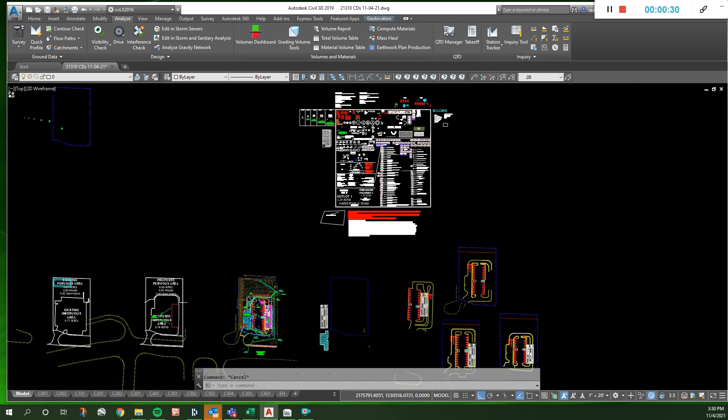So we know our elevations. I'm going to grab a piece of text, make this green, shrink it down a little bit, and we're going to assume that our top is at 10. So that's going to be right there.

This is going to be 2.5 feet down: 6 inches for the top and 2 feet for the cover, which is 2 feet minimum from the top of this to the bottom of the section. So that's actually right there.

Then we go down another 3.79 feet for the chamber, and then they have 9 inches. I'm just going to stick with the 9 inches since that's what they had on this, but typically that varies — typically it's 1 foot. So 7.5 minus 3.79 is 3.71. We'll just say 3.7 because I don't like doing hundredths.

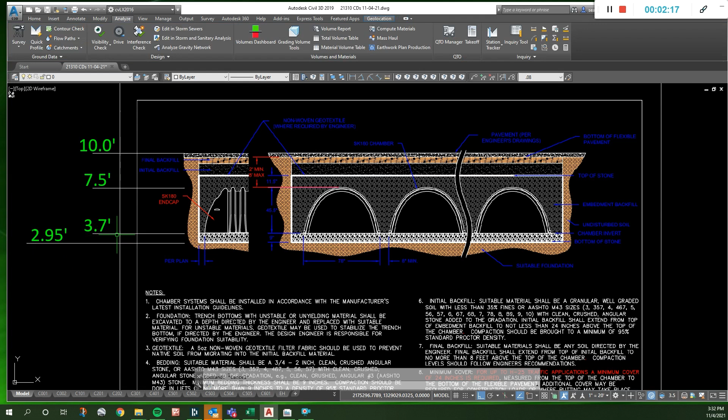And then 3.7 minus 0.75 is 2.95 — I guess we will do hundredths there since that's halfway. Alright, so that's roughly where we think we might do this.

In order to do that, we need to raise this up a little bit. We need to put some flumes in here. I don't want them getting near these metal brackets, so I'm just going to draw a line and go halfway in the middle, and then do it 2 feet on either side. Does that look kind of dark?

And so we have that one, and then we'll have one down here too, so that's probably where our flumes will be. Let's see, this slopes down in here and then comes back that way. This slopes down and comes that way. We basically have a swale here.

This water goes this way and this water goes that way. But I'd rather not be pointing water towards the building, this close to the building, when the water is already coming this way — because basically what we're telling the water to do is go like this and then come back here, and the water might as well just do that.

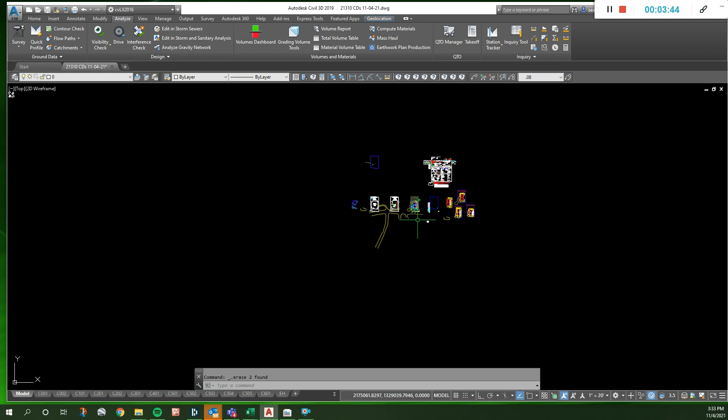So I'm going to recommend some other numbers.

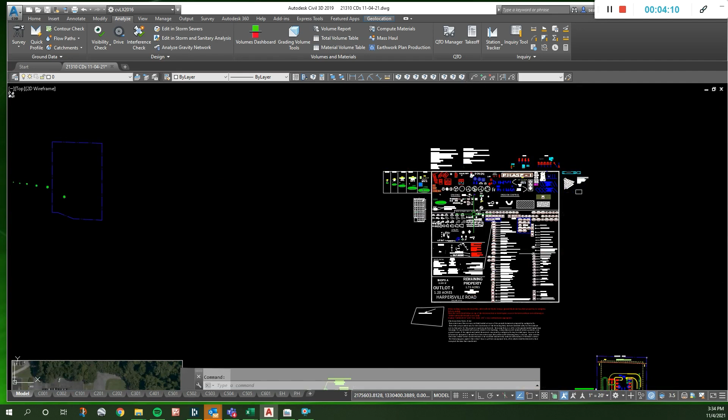Where did the spots go? What happened to your spot elevations, the existing and proposed? Do you know? No, I've just been seeing X's inside the block for a minute. Say that again? It's just been X's. I think that's the same across other drawings too. Shouldn't be that way — I don't remember any being there. Really? I was just using the COGO points and then setting the style to proposed and existing.

CAD title block. There we go. I grabbed the wrong size. Alright, let's get out of there.

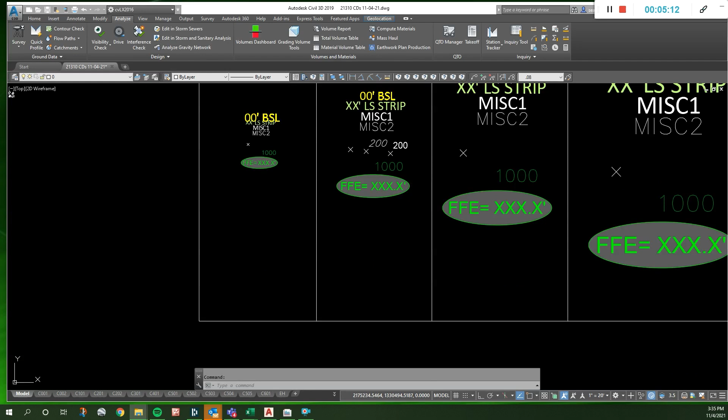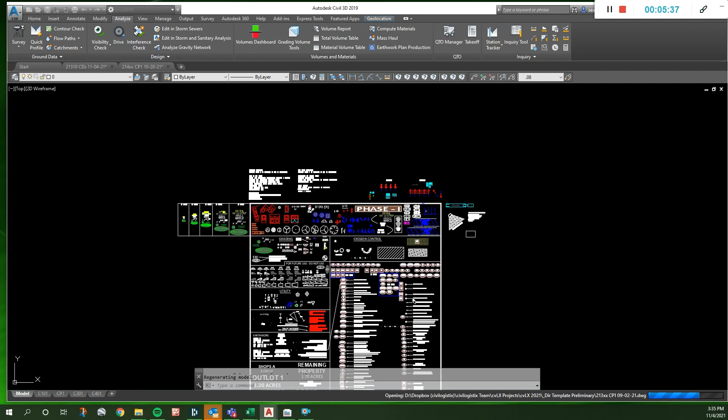Let's just check while we're here the project template — maybe it somehow got deleted out of here. They look like they're there too. But that's weird. Someone deleted the 10 of the 20 out of there. Now they're all in the older one.

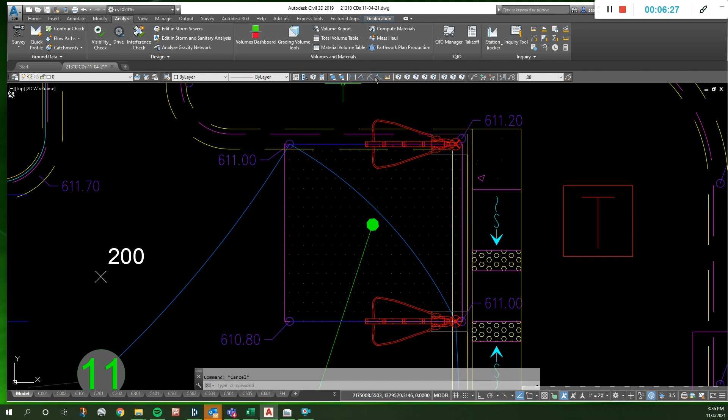Alright, so this, you've got 2 tenths over 18 feet. 0.2 divided by 18, it's 1%. That's good. Let's just keep this going down at 1% for another 25 feet, so we'll round that up to 3 tenths. So this will be 610.7.

And let's make this — what color do we want to make it? Yellow? Does that stand out enough to know that they're an optional thing? We drop another 2 tenths, which would be 5.

This curb line shouldn't stick out in front of this guy. I keep seeing this lately — I don't know where it came from, but it's already hard enough.

You know, when you go into a parking lot, you've got a little drive aisle, and then you have this little curb there, and you need to turn. There may be someone coming out, and you need to make a sharp turn to get in here, and you've got this curb sticking out, and you wish it wasn't there. What I like to do is draw them — this is ideal, but I never take the time to do this on a preliminary.

If your parking spaces are like this, I like this guy's gutter line to be like that, and the curb to be like that, so when you look down this thing, visually it's like a straight line all the way. If you actually put the face of curb out at the same place, which is how I draw all my preliminaries, the gutter actually sticks out. So when you're driving and trying to make this corner, it physically looks like the gutter is sticking out past this, and you've got another car sitting here, and you're trying to squeeze in, and you're like, man, why wouldn't they just give me a couple extra feet?

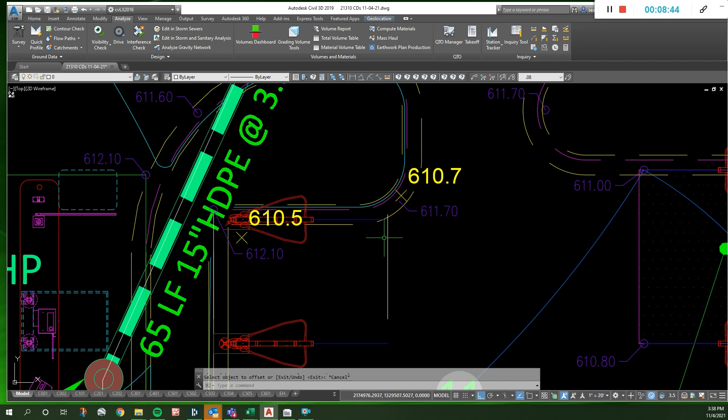So if anything, you want to move this back 1.5 feet. Instead of the face of curb being there, the gutter's there — that's what you'd do ideally. We're all about speed for preliminary, so we usually just leave it that way. But in this case it's actually sticking out further into the drive aisle, so it's going the wrong way of ideal. We should update that — if anything, think about pulling it back, not sticking it out more.

And then what that does also is this guy that's bailing out and coming in — instead of coming in more towards the center of the driveway, you're putting him over on the side of the lane where he should be.

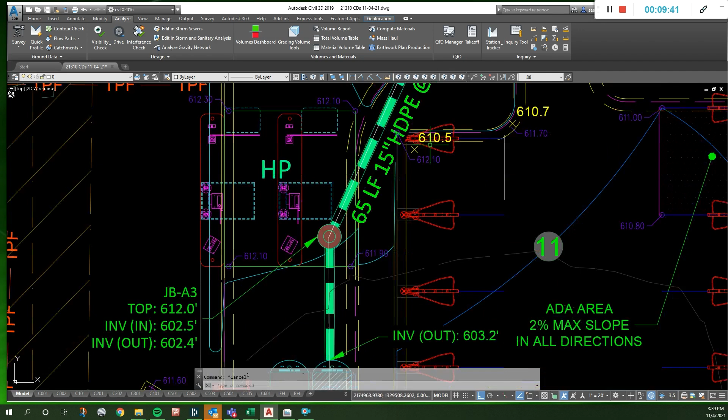So we kept this at a minimum slope. One thing you can think about, if you need to get water from here to there, if you slope it in two directions at the minimum slope, it can get the longer distance easy at the minimum slope. So now from here to there is 70 feet, so if we drop another 7/10, we're at 6.9.8.

And then we need to get from here to there — that's going to be another 1/10. Seven. And then six.

Now you can see we didn't meet my goal of 10 — we're short by 4/10. Let's just review all this: 11.5, so we drop a 1/10 there, 4, and then 9 should be kind of 10.9, but we're at 10.2. This is actually going... what are we doing here?

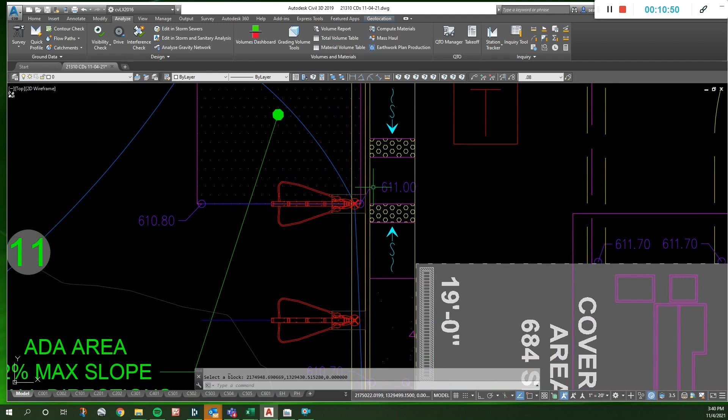It slows down for the hatching when you get out of your van. Did Shane have that? We agreed he was going to put the door in here on all these projects. I think it's fine on this one because we have enough space, but on some of them we don't have enough space.

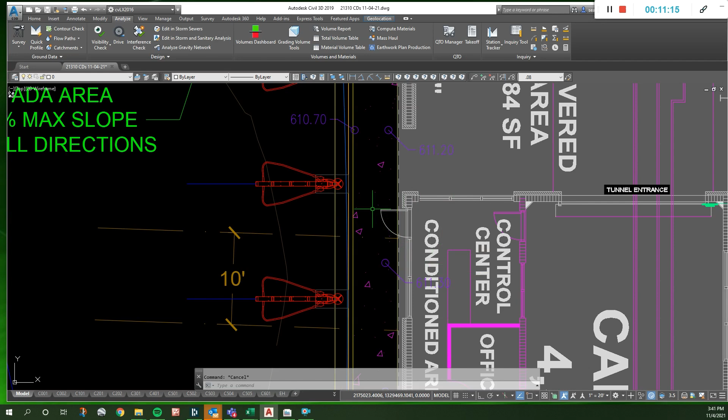So let's look — Halco Architect. Okay, so we don't even have anything from him yet.

Hey, Tim. Hey, I've called in enough messages regarding the Mary Camp progress, yeah, and just want to give you a heads up — I haven't heard back from anyone yet. I didn't know if we should respond back with those emails and say something, or... No, because I told him we're checking into it, and I gave him the info that we have. They just had on that email there was like an urgency for where to go — anyway, they were saying we needed to know something by today, whether they wanted to submit something for this week, tomorrow, or next week. Yeah, okay, well then you can tell them we haven't heard back, I guess. Okay, all right, thanks, all right, thanks. So let's leave it.

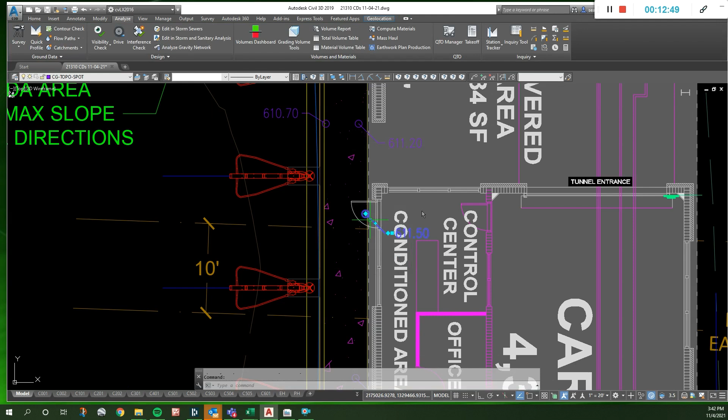So this guy in front of the door would need to be the same as this, or if you're 2/10 down, you can't get up in there, right? So this guy should be 0.5, and then you typically slope 1/10 over the sidewalk, so that's going to take you down to 4 right there. And if you keep this perfectly flat, it's going to be 4 here, and then it's going to slope down to 10.9.

Now you could also choose to just start sloping down at 5%. Anything less than 5% is ADA. If it's over 5%, it's considered a ramp, and any ramp over 6 inches tall has to have handrails.

If you're going to do a ramp, you might as well do the steepest ramp you can, which is 1 inch per foot, or for a 6-inch curb, a 6-foot ramp. If you make a 7-inch tall and 7-foot long ramp, you need handrails for the whole thing. So if you're going to make a ramp, just make it the steepest slope and either keep it to 6 inches or less so you don't need handrails, or at that point drop down to 5%. Well, it also gets confusing.

If you decided to go down at 5%, you'd basically go down over the course of one parking space. You could slope down your 6 inches, but at that point there's really no reason to do that when you can just do your normal ramp in 6 inches. You don't want a low sloped ramp with half a curb tapering down over some long distance, because then it's hard to pour. You just want to do as much straight curb as you can, then do your ramp, then pour everything flat.

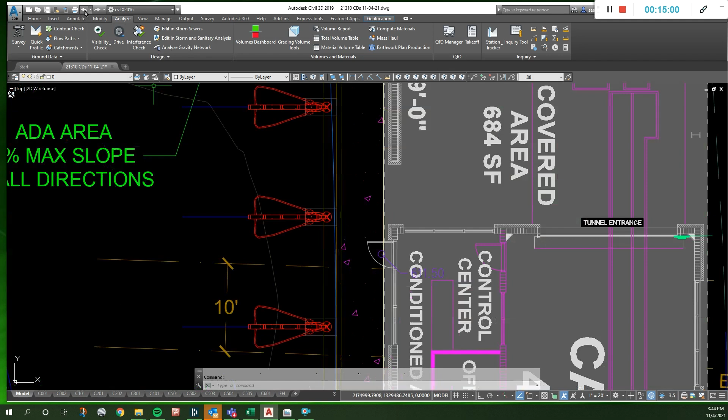So this guy, we'll get rid of those. Keep that at 0.5 and 0.4. Did I accidentally delete that 4? Yeah, delete these 2. Why are these things acting funny? Delete, delete.

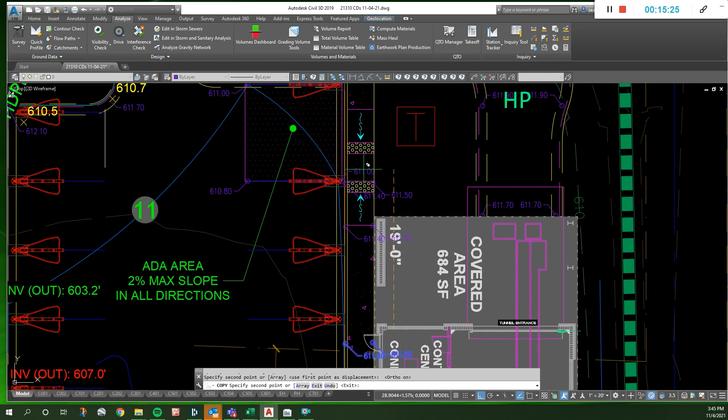So that's going to be the same thing there. And then when you get here, it's going to go down your 6 inches. So this guy is going to be 0, and this guy is going to be 10.9.

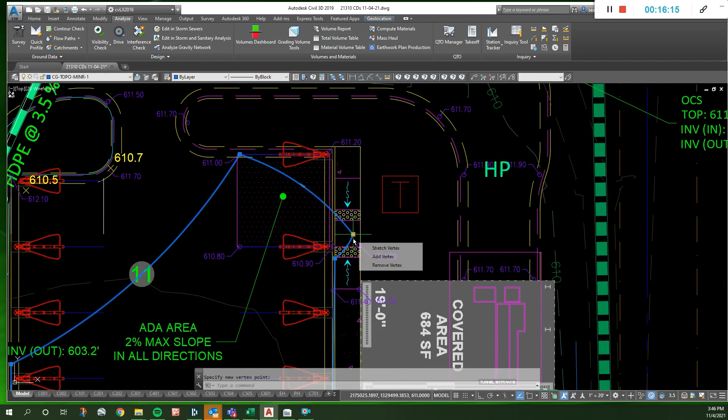Which means your... is that a curve? Yeah, I'll just make that a straight line. And that's just going to stay in here in the curb until you get to the ramp. Make that a line, let's go ahead and make this a line. So that's going to cut across this, because this is below 11 and that's above 11, and that's exactly 11, right? Does that make sense? Yeah.

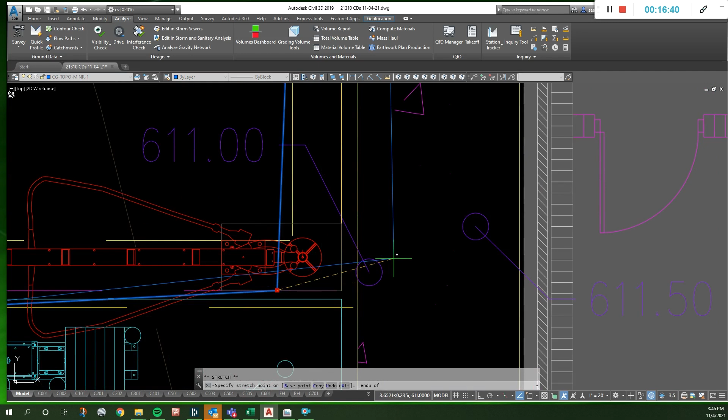And we don't want any curves in there. Where's your curve line? There it is. Is that another curve? Oh, that's straight. Okay, alright.

This guy, and you really, there's no reason to have a ramp going up. Ramps are expensive, I've seen them priced out as much as $1,000 for just a handicap ramp. So why just add a $1,000 to have a ramp that goes nowhere?

So we can just keep all of this. That's another thing: whenever you hatch things, just hatch everything individually, because if you ever need to make changes, you have to rehatch everything and not just the one thing you did. So we need to rehatch this.

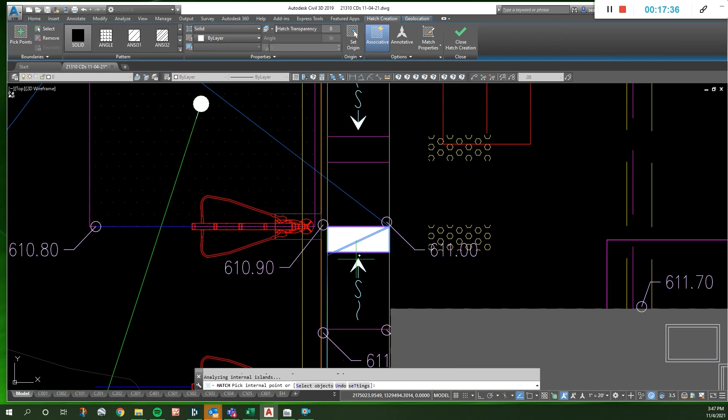I'm going to use this guy to take that and apply it there. Then we can go ahead and delete that, and get rid of these guys. I'm going to change this to not associative, and move it down here where we can't really see it, instead of rehatching everything. That solves that problem.

And then we get rid of that. And then this guy, we want to break. On this side, it's a hard line. Let's go back to the site plan so you can see there. Actually, this is the one I meant to break: the face of curb.

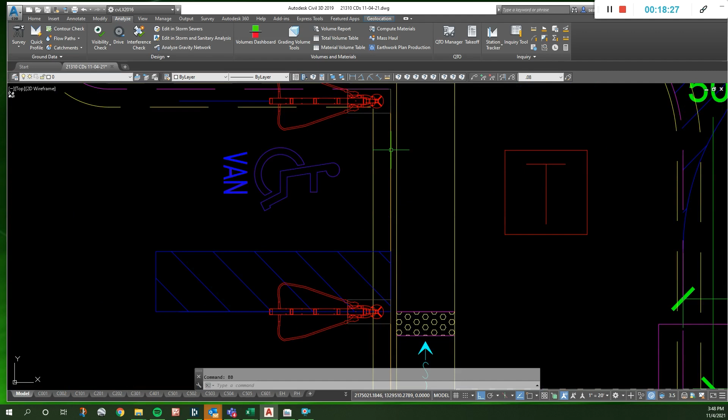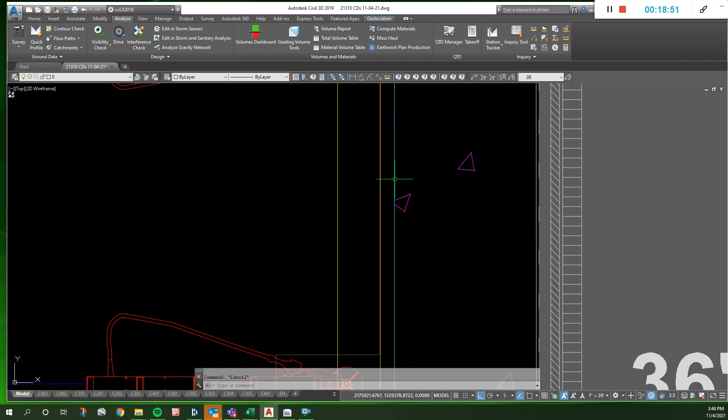Here, there's no curb, so we need to just delete that. This side, I would make it cyan because it's really part of the sidewalk. This guy is part of that sidewalk too. It's really just a seam - this is concrete and that's concrete, and they're both at the same elevation. It's really just a seam, kind of like we have out front there.

And so that stops when you get to the ramp, because this isn't curb and gutter - this is just a custom thing they have to make, right? So I like to take this guy and make this a different color here, because that's where it starts changing from being a curb to something special. And then that shows your ramp is there, and then all of this is just flush.

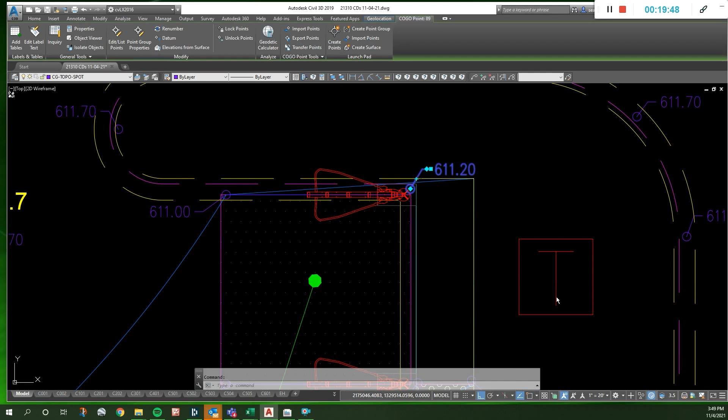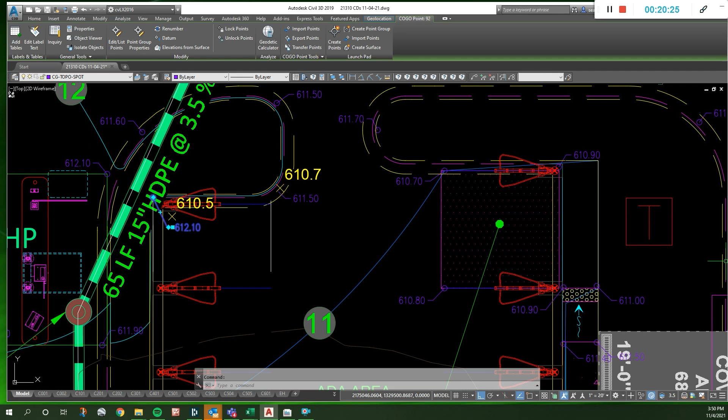Alright, so we'll go back to the grading plan, and really all of this can stay the same. This guy is going to be 10.9, and then we need to slope down, so we need to lower everything a little more. We're going to change this one to 10.7 - promise we'll get to some other stuff. This one's going to go to 5, everything's going down 0.2. 5. 10.3.

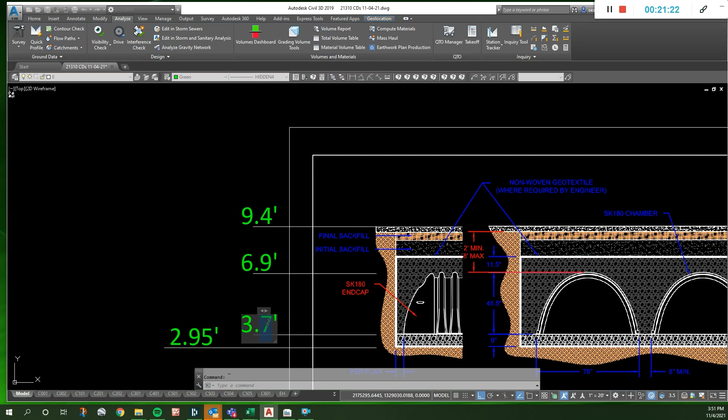Ten point 6, 5, 4. Okay, so we're at 9.4. So let's go back down to this guy, and we'll take 6/10 off of everything. 9.4, 6.9, 3.7, 2.95. Alright, so the bottom of our thing, these are the elevations.

So what I was talking about yesterday, they may want us to give water quality because they probably typically see water quality, but we're in a weird situation where we're reducing our impervious area, so we technically shouldn't have to do any. But they may still say you should do something. Well, we have to have this stone here anyways for the chambers, so why don't we just put our hole here, and then we're giving them some anyways.

Just take credit up, and then we'll put our hole right there. So our hole we'll put at 3.1. So we'll lower this guy down. So it was a weird number, but is it a really good weird number? 6.2. Let's leave it at 6.2.

We'll have a little bit low cover there, but you could also say that this slopes 1/10 of a foot. By the time we get here, we're up to 6.5, or sorry, 9.5. By the time we get to the actual chamber, you know what I mean? No, this is 9.4.

This has to be low. All of this has to be higher because it slopes that way, right? Oh, so this is going to be 9.5. Well, if it's flat, water's not going to move. Oh, the ground slopes, not the tent. Okay, yeah.

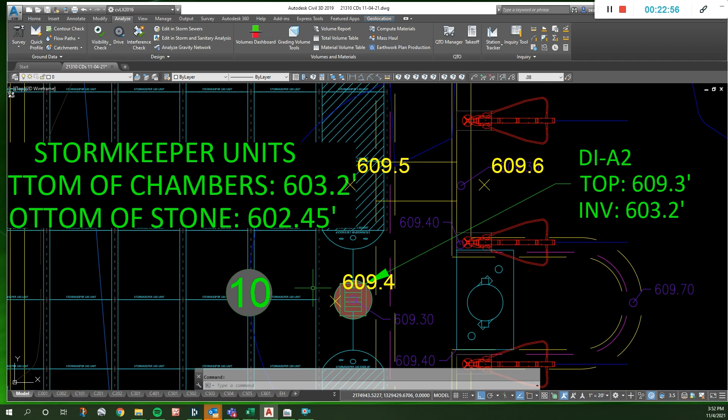So if we were measuring 2.5 feet down, we could really come up 1/10 and measure 2.5 feet down, and therefore we just keep this, and then we don't have to change any of that. So again, we don't want to make this any deeper than we have to, so let's just do it at 1%.

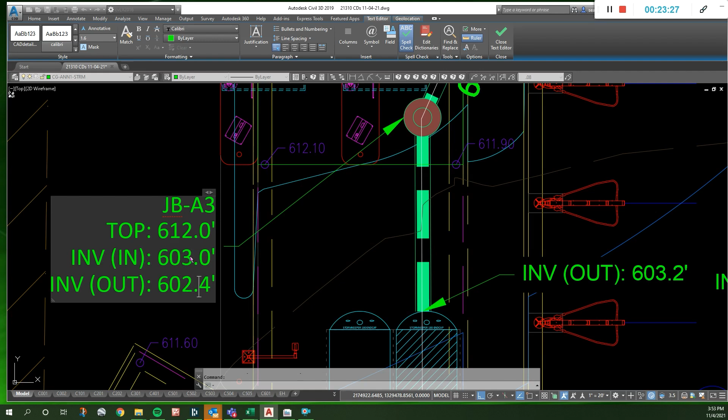So this guy is going to be 21. We'll make him coming in at 3 and going out at 9. And from there to there is 45. We'll do 5/10. So it's going to come in at 2.4 and go out at 2.3.

And then from there to there, 90. So 1.4. So we're going to come in at 1.4. But then we're going to go out 5 feet deeper so that we can get past this swale here without having our pipe come out of the ground. And now this is more shallow.

Now another thing we need to think about is the geogrid. If we're doing a modular wall, they're going to have some geogrid coming in here. There won't be any here. Typically, the geogrid might be as deep as the wall is tall.

So if we're down at 602 and the wall—what's the top of the wall? It can be labeled on the site plan. Nope. Top of grade, 602, let's say 611.5, and the bottom grade,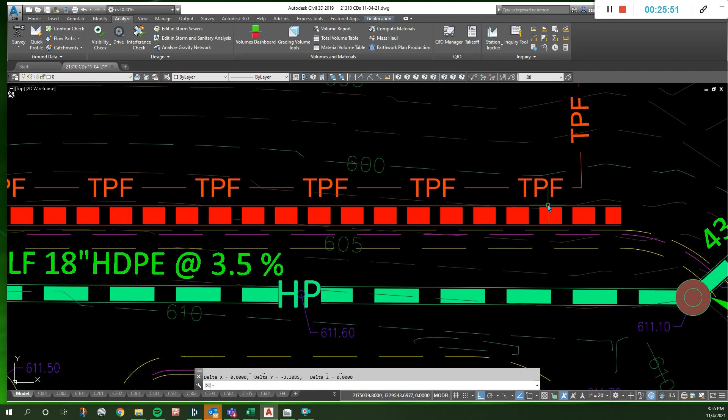you really want to have kind of an even bottom. You don't want to have it going up and down. It just makes it harder for them to do. So this is kind of our tightest spot. Right there we are 3.3. So if we made this guy 601—wait, that's 602. If we made that at 602,

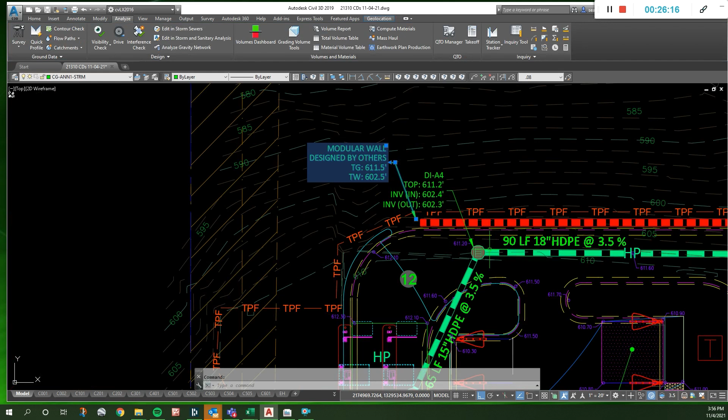whatever the last stuff, alright, 9 feet. That's not that bad. Oh man. So this being at 602 is at the bottom of our thing, isn't it? Needs to be lower. Not necessarily. So if it's 9 feet tall, you can imagine the geogrid might be,

you're really not going to have any in the top few feet. But if this is 9, that probably is going to be about 9. And if we have a pipe there, we probably want to be about 9 feet away. And let's just offset 9 from this guy.

So it'd be nice if we could move this over just a little bit. Here we're fine because it's out of that thing. But this guy, we can move down. I don't think it's really going to make that big of a difference because it's still going to slope.

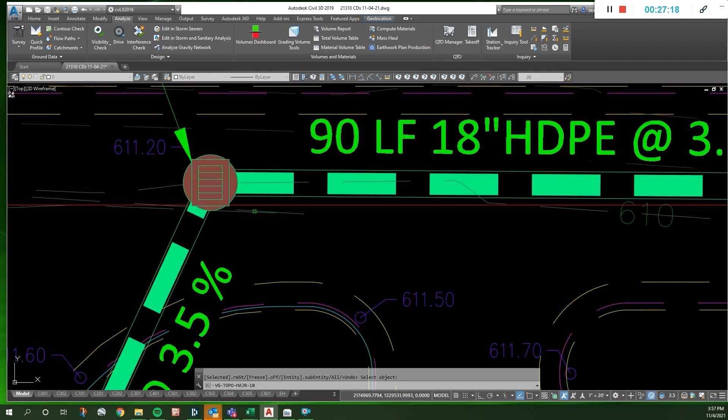Let's just move that guy a little bit. And I'll move it in the direction of this pipe so you don't have to change much on your profiles, like that. It's okay, profiles are TBD. I'll just lower that 4 feet. And that gives us some space there.

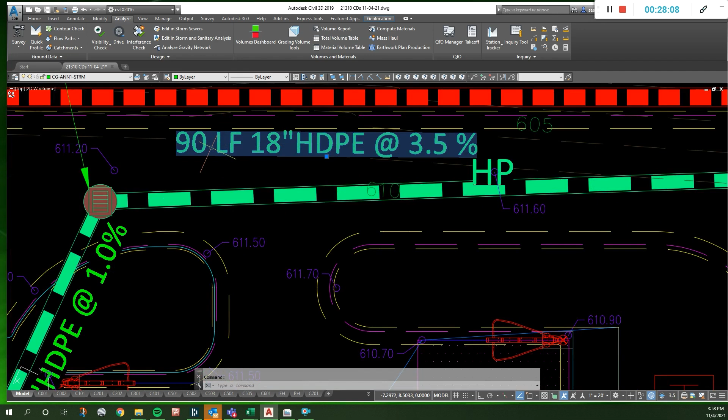Alright, so now this guy is 61. We're going to make all these 24, and it's basically 1%. And now this guy, I think, was he 90? 91. 91, 24, at 1%.

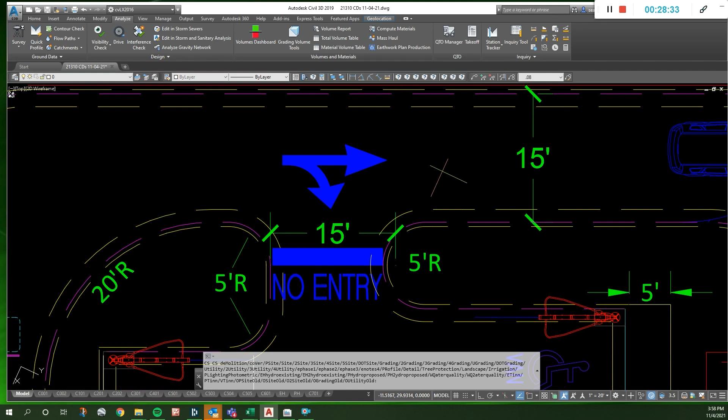Alright, now we have a little more space here from that footing, which is kind of good. Alright, so we redid that.

So now let's think about our water quality. The area of the bottom is 3160. We have 9 inches of gravel, so 0.75 feet of gravel times 0.4. I like to think of things in per unit volumes, especially with cross sections. So we have 0.3 cubic feet of storage per square foot of cross section.

And our cross section was 0.3 times 3160, so we have 948 cubic feet of water quality volume. Actually, nothing was soaking in, was it? Infiltration, yeah.

Wasn't it like 0.03? Can we also factor in those end caps for the rock under, because the area was drawn around. Yeah, but we don't know what that is. I don't like calculating that volume. We let Southeast Culvert calculate that for us, and the software can calculate it for you. But I have no idea what's in that three-dimensional curvilinear shape.

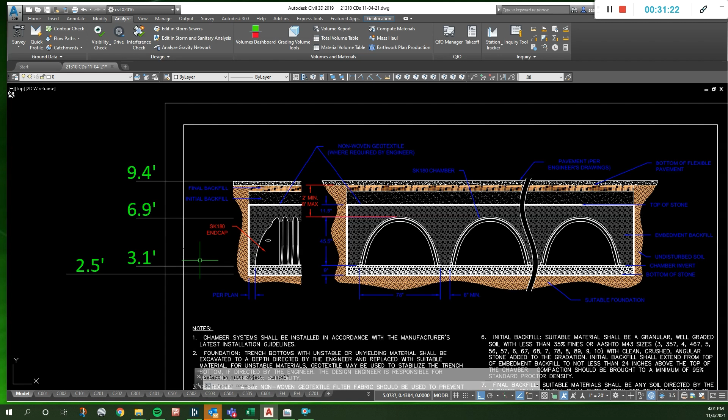And 6 inches below is 2.5. Alright, so now if we want to do water quality, we can't say that's our water quality, because it's never going to soak into the ground and it can't get out the hole. So it's basically, once it rains once, it's trapped forever. So why waste the money and buy clean wash 57 stone? You might as well just put crush and run in there. So we're going to do our water quality by just giving them a little hole for a small volume.

And they said they wanted 1.1 inches. 1.1 inches divided by 12 to convert to feet is 0.09. And let's just say we gave them a quarter acre worth, as though we were increasing our impervious acre for a quarter, but we're not - we're decreasing it. But we're just going to give them some anyways. Times 0.25 times 43,560 - that's 1,000. So that's about where we were.

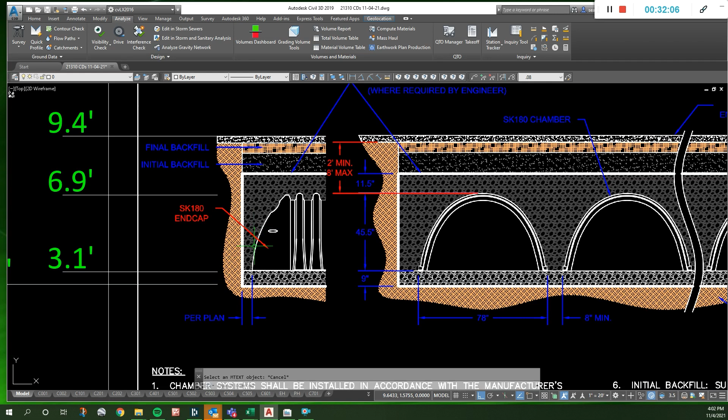So let's just kind of keep in mind, ballpark, water quality, 1,000 cubic feet, and that is 1.1 inch divided by 12, times a quarter acre, times 43,560 square feet per acre, equals 998.

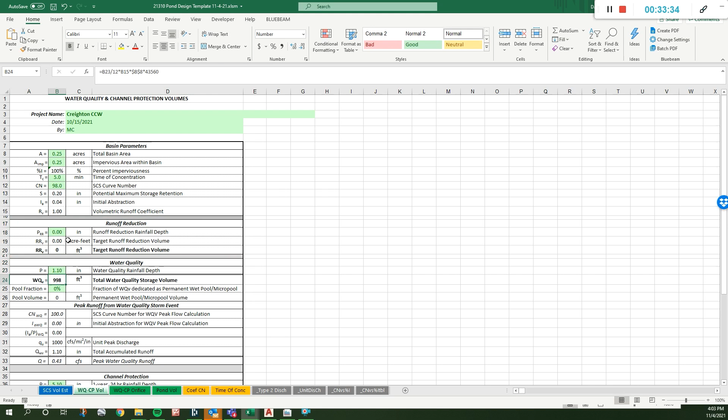Okay, now we don't really need to do this, but we know that in our chart, calcs, pond design - is this just a random thing? Quarter acre. Water quality, 1.1 inch. So there's our 998, right?

Do you have your pond in here? Is that from this? Yeah. Okay, that's... and it's probably going to change a little bit. Oh, we don't have any - yeah, because since we're using just underground, it had volume, so we had to go in and enter the volume, put the volume in rather than... yeah, that's fine.

Right, that's different. Where do the chambers start? Let's look and see where the chambers start.

We're gonna have to go back and iterate and change this because I think the pond's way too big. But there's no reason to get this exact and then go back and change the pond and put all the numbers back in again. So I want to get just a rough ballpark of this matching that, so we can get this roughly correct, and then go back and redo it all at once. So the bottoms, the inverts of the units, are at 603.2.

I can't type anything in. 603.2, and that's 0, and then we go up to 603, and that was 690. No, it's going to be 603.5, 694, and then the next one up, 604.11. 1284. That's more than enough.

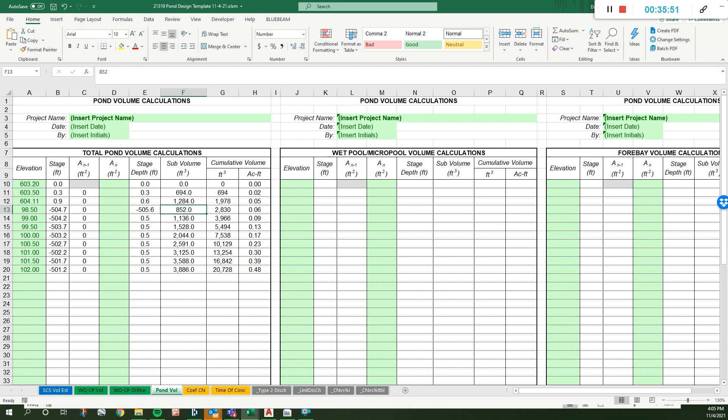Where do these kind of strange things come from? Oh, it probably spit it out, didn't it? Yeah, it just divided it into 10 pieces. That's the shape of it.

So there's our water quality volume, and it happens at 603. So it comes up 0.4 feet above the bottom. Now I'm just going to go back in here, water quality orifice. 603.2 is the bottom, and it calculates it at that. That would just clog instantly, so we'll just do an inch, since we don't have a real requirement anyways, and we want to give something that works.

Alright, so now we know that we're going to do a 1-inch hole. Let's go in and start designing our pond. Here's where you need to start paying attention again. We don't have any water quality requirement. We're doing a little bit anyways out of the goodwill of our hearts, but our only requirement is attenuation, right?

So we want to let out as much water as we can let out, but not go more than it was previously, right? If we're holding back extra water, then we're just wasting volume in our pond, and our underground pond is really expensive to begin with, so why waste extra volume? So we just want to start letting out as much as we can from the very beginning, with the exception of our water quality volume, and we're not going to make that very big.

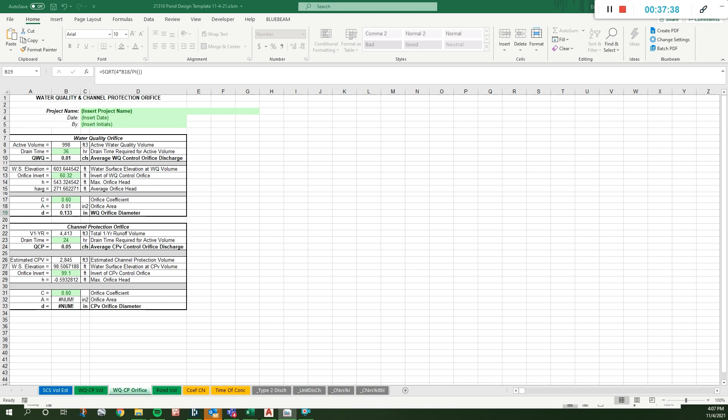For now, we're just going to leave this the same. And I like putting my outlet pipe a little bit lower than my holes. My holes are, what is this? This thing, where can we move this guy to? There we go. The bottom is at 603.2. So that's where our first hole will be, 603.2, because below that nothing can drain out.

So we'll put this guy. Oh, that's what we said this pipe was draining out at, right? Yeah, 603.2. Let's make, we don't want to make that a little higher. We'll leave that the same. And we're going to make this a 1 inch, because that already is going to be thinking about clogging.

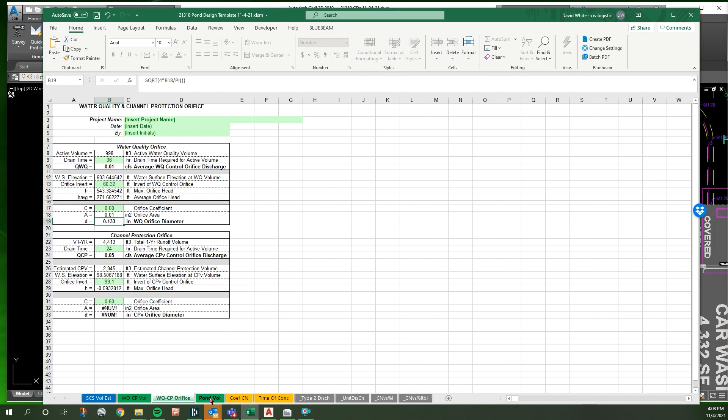And then our next hole, we'll just come in, I don't know, 3 inches above it. Oh no, we said, what did we say it was? How big? 0.4? Yeah, pond design. Water quality elevation 603, yeah, 0.4. So we'll just do a half a foot, so we'll come up

603.7. And the reason I did a half a foot is we typically come up an extra tenth over whatever this elevation is, just so the contractor could make it wrong and they don't encroach into that volume. So if we just go by that same principle, that makes it 603.7. But in reality, we don't have a requirement, so we could kind of go up or down anyways. But 6 inches is also just kind of a nice even number. You know, it's not that big. And then if you have a hole down here, it still is just a small gap in between.

So let's put a 6-inch hole, and we'll see what happens. And so when you run these things, you always want to start, we're going to design from the bottom up. And we're going to, because once the water ponds up to a certain volume, everything below it is just going to stay exactly the same. You know, if the water fills up to here for a 1-year storm, we get the 1-year storm working, it's going to be the same exact discharge every time it fills up to that elevation.

So once you know, we get this one dialed in, then we're going to go to this one, and we're never going to go back to that unless we change the pond shape, and then we got to start at 1 again and work all our way up.

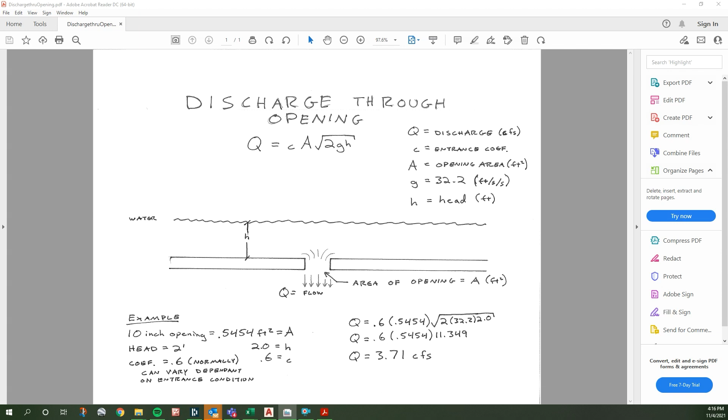And we're less than 6,000. All right, now here's something else you need to think about.

When you make changes to the pond, you heard Michael say this, just change one thing at a time and see what it does, and you need it to make sense. If you change it and you think it's going to go down and it went up, don't just try a different number. That's how you get not good at doing hydrology studies. Make sure you understand why it did what it did. And if you don't, then come get me and I'll help you figure it out.

Occasionally it doesn't do what it's supposed to do. Like we ran some tests, this happened a few years ago, and it wasn't doing right. I posted on a forum that the thing was jacked up, and then everybody else started posting too that they noticed it was funny, and it turned out that a Windows update had made it kind of buggy, and Autodesk had to come out with a fix. So software is not perfect. If it's not doing what it seems like it should be doing, it could be that you're just not understanding it right, but it could also be that it's just wrong.

But it might take a while before you're confident enough to say the software is wrong and your head is right. But it has been wrong. And last night it was doing that again, and I checked, and sure enough there was another fix that they had put out a couple months ago.

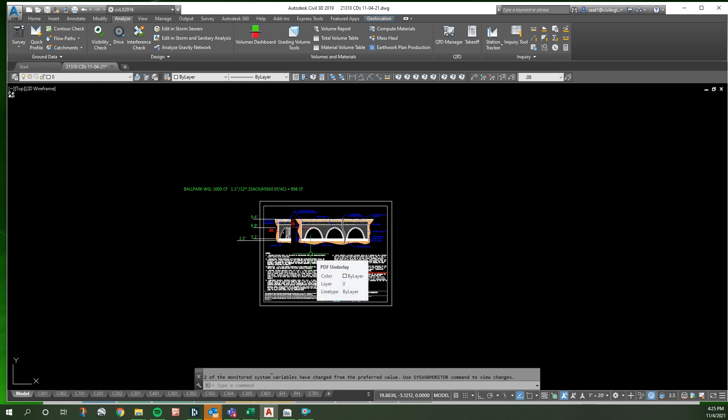What if we could just do 2 or 3 rows? 1, 2, 3, 4, 5, 6, 7, 8, 9, 10, 11, 12. So we would need about 3 rows times... 3 rows of 12. That gives us. So this length is 99.

Yeah, good. I see you're using those things. 99 and a half. Alright, so let's go back in here. Let's save another one as V3.

We're going to keep that the same, keep that the same, keep that the same. Barrel length is 99.5. We're going to do 3 barrels. Headers, yes. Stone encasement, yes. The bottom, we're going to do the same as that because there's not going to be any storage underneath of it, so we'll do 603.2.

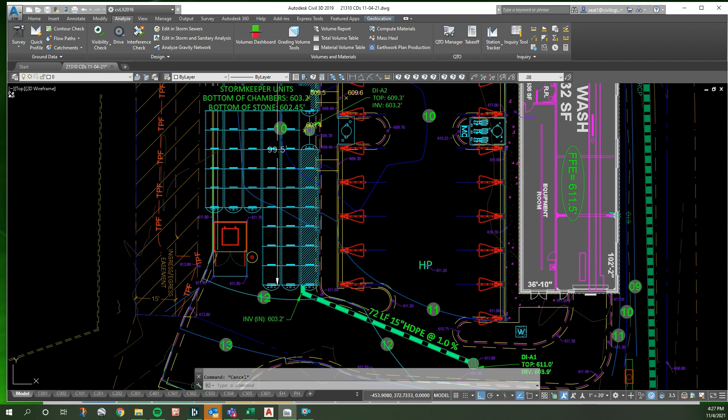The width, wouldn't that be? I thought that was the total width. Let's see, 7.39 minus 6.5 is 0.89. Eight inches. 78 plus 8 divided by 12, 7.81. Did I do that? 78 plus 8 divided by 12, 7.16. So I think that should be 7.16.

7.16. And then the depth is 3.79 plus another foot on the top, so we'll call that 4.79. Alright, so now we're down to 6,800. 36 times 180. So that's a little bigger. I wonder if we have more stone than their standard thing.

Oh no, we've been talking for an hour. This is getting ridiculous. Cut sheet.

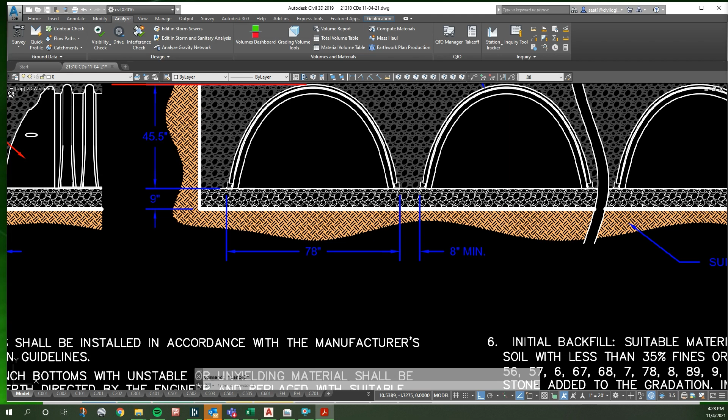So 9 inches is their standard. And chamber volume of stone, and they have it 12 inches on top. Wonder why this is coming out bigger.

Let's do 11. 1, 2, 3, 4, 5, 6, 7, 8, 9, 10, 11, 12. That's why, one reason why. So there's 12 and 3, we'd lose a couple there. That's 85.3.

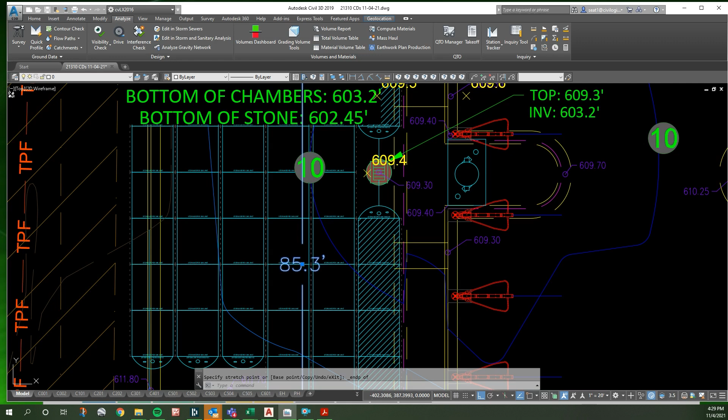And if we're losing 2 units here, divided by 3 barrels, that's 2/3 of a unit on each barrel, right? And if each barrel is 7.1, 7.1 times 0.667 is 4.8. So let's just take off another 4.8 feet off of this, which is 80.5.

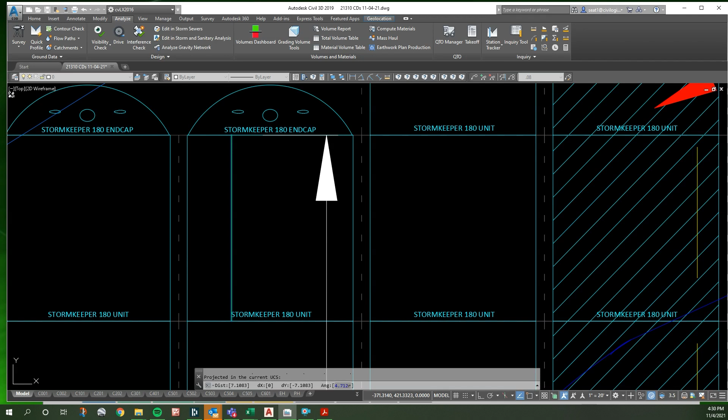Alright, so now we're closer. Let's roll with that. So basically what we're saying is we're not going to have these guys, and we're not going to have any of those guys, and we just have this. Is that fair? Mm-hmm. Does that make sense? Alright.

So now we've got to start all over again. But we've already explained everything, so it shouldn't take as long this time. That's about the same, actually a little bit higher because now that our pond is smaller, it's ponding up taller than wider. And we're getting more head, so we're letting more out. So that's kind of a good thing.

So that's okay, that one's still okay, that one's still okay, that one's okay, and that one's okay. So we could still make this weir a little wider. Let's try making this a foot and this overflow 3 feet.

We're still less, we're still less everywhere. Alright, so let's go back into...

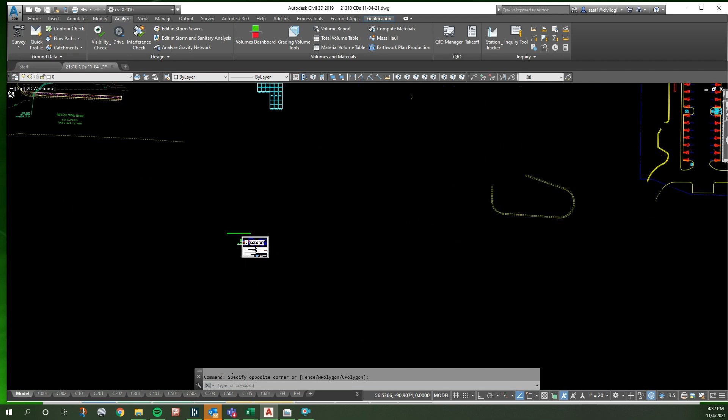I guess one thing to point out, we didn't really need to draw anything that detailed in order to put this in Hydrographs. We just needed to have kind of an idea of our cross section, and then either how many units or what general size, and then we just put that information in Hydrographs and designed our thing. So you can do all of this stuff before you really draw it out. All you need is some generic boxes to kind of pencil in your volumes or sizes.

Does that make sense? You need the area of it to determine the volume. Yeah, especially because we generally we're going to be doing infiltration, and so in Georgia for an infiltration trench, they want this to be 3 feet. So in Georgia, a lot of times we make this 3 feet, but it's 6 inches for this project.

Well, here it's 0, there's no storage volume at all. There's no infiltration there, it's just crush and run, totally solid. So we can't say that we're using an infiltration trench, or anything, because there's nothing, they can't soak into the ground.

So if we have 3 feet in Georgia times 0.4, that's 1.2 feet of water volume per unit foot. And if we had an area of 3,200 times that 1.2, we would have 3,800 cubic feet for runoff reduction. When you do your stormwater strategy, you just type your numbers into the spreadsheet, and then it tells you what your runoff reduction number is. And then we just made a quick calculation right there, to see if you're bigger or smaller.

So really all you need is to know in your head what your cross section is, and then sketch out an area and multiply it together and see if you're good for your runoff reduction. Alright.

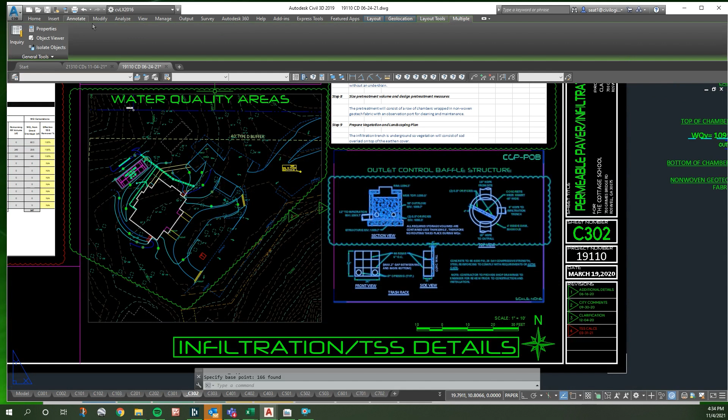This guy. And you don't have a 302 yet, do you? No. Let's make a C302 water quality sheet. Yeah, or just a stormwater BMP sheet, really.

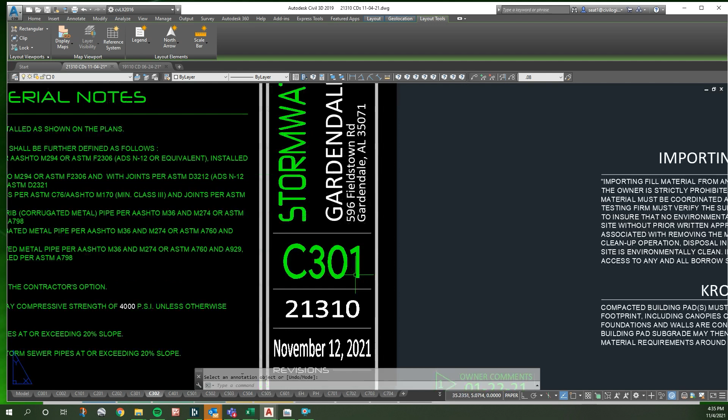In this case, our BMP is not so much for water quality as it is for attenuation. We really want a sheet for each BMP, so a sheet for the detention and a sheet for the OCS.

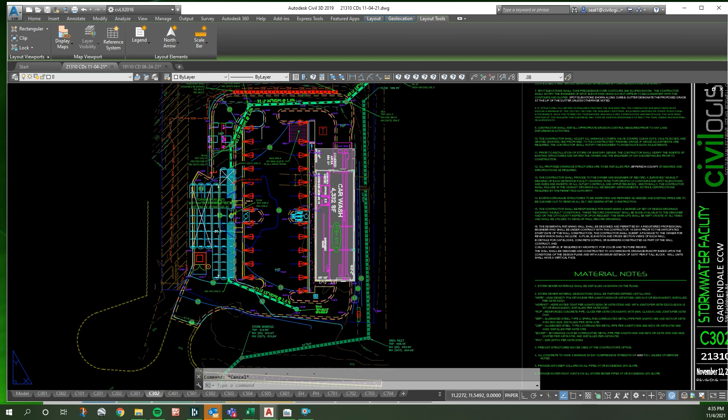Well, the OCS is part of your detention, so you could just throw it all together. But if we were doing infiltration and underground, you would do one for your infiltration and then one for your stormwater facility, because in Georgia, they're considered two different things, one stacked on top of each other, but they consider them two different BMPs.

Alright, let's get rid of this junk. I guess we really don't need that either. Oh, I'm missing part of that guy. I exploded it to make changes.

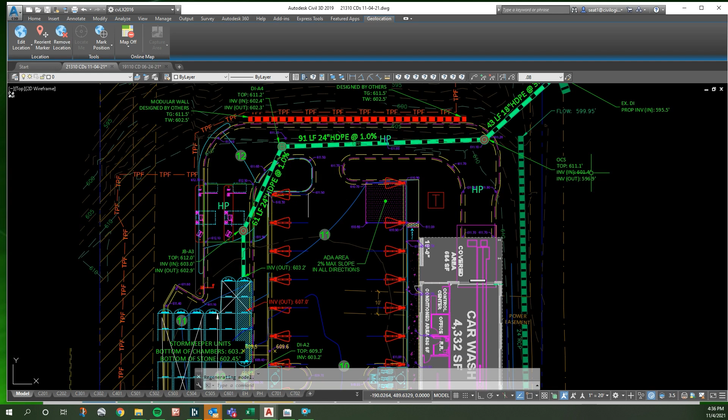Alright, this one, where is your outlet control structure? You gonna do this guy? Oh, I thought, well, since there's a drop inlet above there, we were... No, gonna do it here. Yeah, and then you get extra volume in this. We're not even counting that, but that's free volume. Alright, so we have an angle like that.

Where was that sheet? I'll get rid of that guy. Oh, this one was a block. What I like to do, let's see if I did this here. I don't always do what I like to do.

Yeah, 4 feet inside diameter. I like to draw all my stuff to actual scale so that if I want to go and modify it later, then it's easy to modify. I make that a block and then I shrink the block down to fit in the detail area that I want, and then I annotate it up.

And so I want to make changes. Now it's nice because I can just double click into the block, its actual size. I'm going to get rid of that guy. I want this pipe to be rotated from the center. That was about the angle, wasn't it?

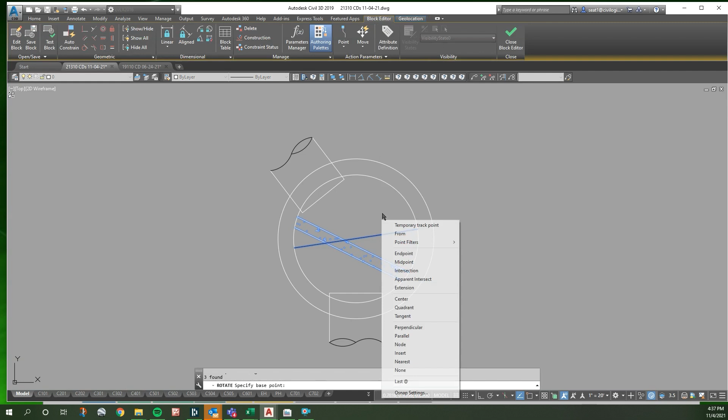Looks good to me. This guy, rotate him. Just make him kind of halfway in between. Was that half?

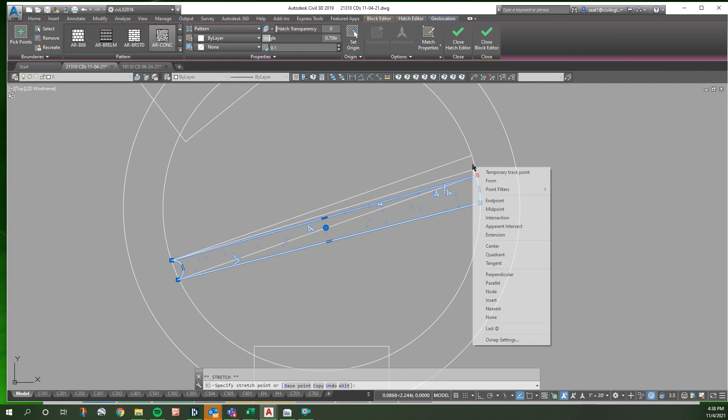I'm going to offset this again, 0.25, make that closer to halfway. I'm not going to make that mistake again. I'll go to somewhere short of halfway, then go again to the other point. Since I'm not crossing over the midpoint, it keeps the exact same curvature. Here I crossed over the midpoint, and that's why it popped that thing out.

Okay, so that one, those are my holes. I don't know where my holes are yet. We'll have to redo that.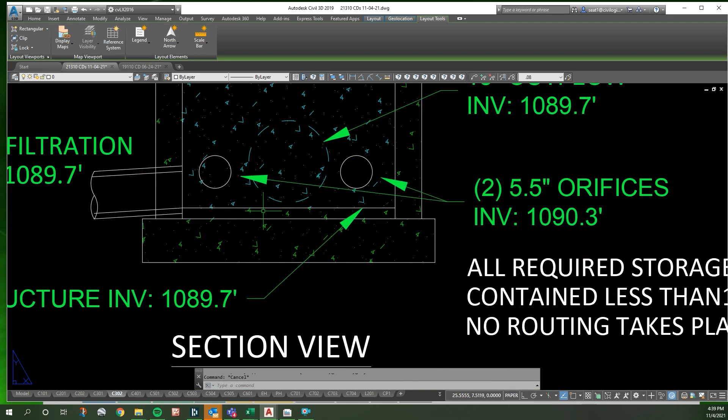Alright, here's this guy. We had two 15s, right? So at the bottom we've got a circle that is 0.05. Let's make sure this is still 4 feet. Yep. Put him to the middle. This guy is 1.5. Oops. Diameter is 2. There we go.

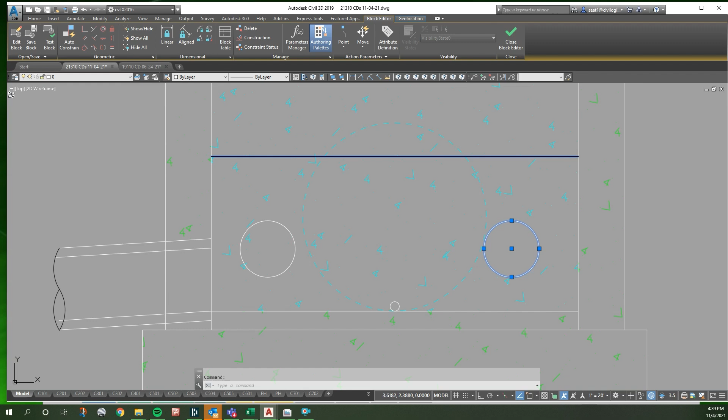And these guys are diameter 1.25. Move the quadrant to the bottom, and then we'll move it up 4/10 or 5/10. 4/10. 4 sounds like a number. 2, 6, yeah, 4/10, sounds familiar.

All right, and then we have 2 of them. Let's give this 6 inches from the side, which is a half foot. Copy from this quadrant to there and to there. I'll just move this back 1 1/4.

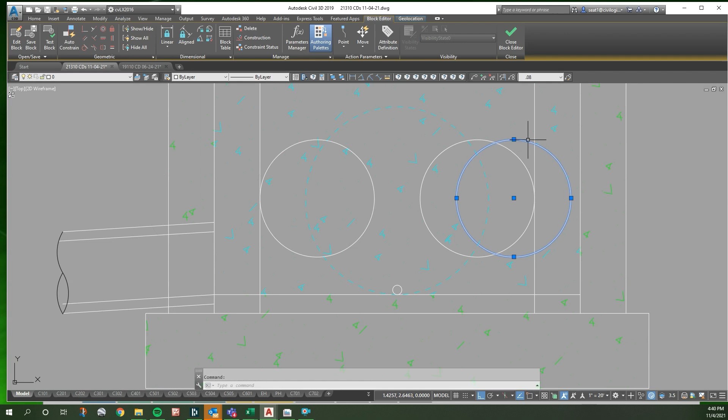No crew here. Yeah, having a party.

Come back later. Okay, all right, and then this guy down the middle, we were out to 1 foot, right? That was 7. Let's go down to... You talking about the spacing? Yeah, I'm gonna move these. Or the weir? Yeah, the weir.

I'm gonna move these over another... Well, I'm gonna make them a quarter foot, 3 inches from the wall to give us more space in the middle. Quarter, because I want to let out as much water as I can, and I'm not letting out enough right now.

This guy, 0.5. Oops. I think that's a little too close.

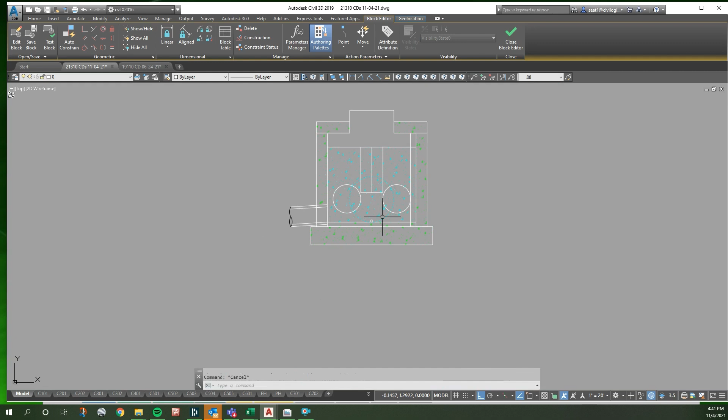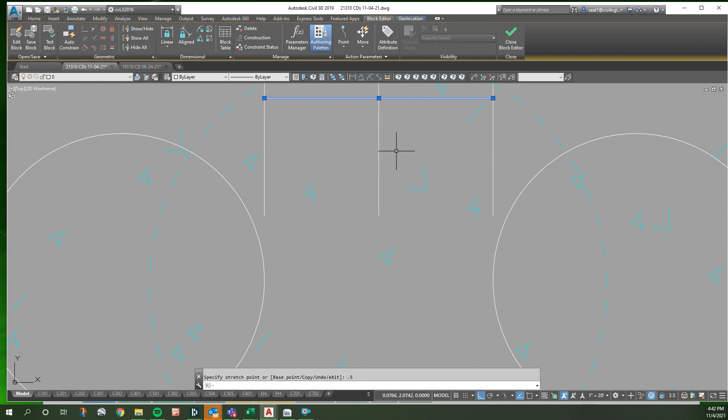Now, another idea, since this really isn't giving us what we want anyway, what if we made this guy smaller, these 2 guys smaller, to give us more gap, and then stretched this guy down and made him bigger?

You think we'll let out more water? For the 50 and 100-year storms, yes. It probably won't change much on the lower storms, because it didn't change much anyway when we went from 12 to 15. But we still just want to let more water out because we can. So let's try it.

So this is the kind of thing you need to know, what happens when you change things around. I didn't want to get too detailed until I started drawing this out, so I could see how much room I have to work with here. You probably want to always keep at least 4 inches between holes and things. That's probably pretty close on something big, but on something small it's probably fine.

So let's go back in here. Let's test our new theory out. We'll make these guys 12, and let's make this guy 1.5 feet.

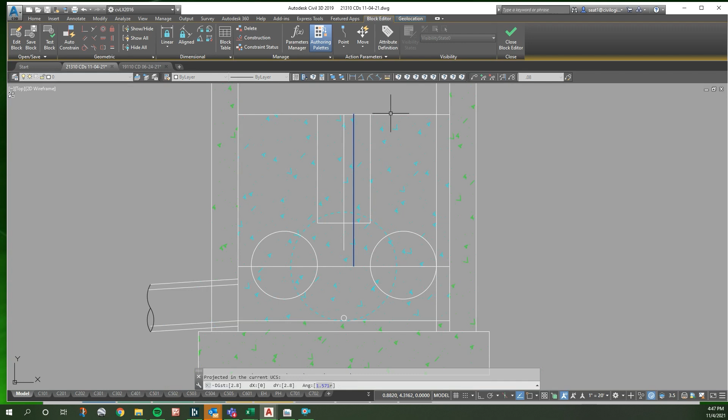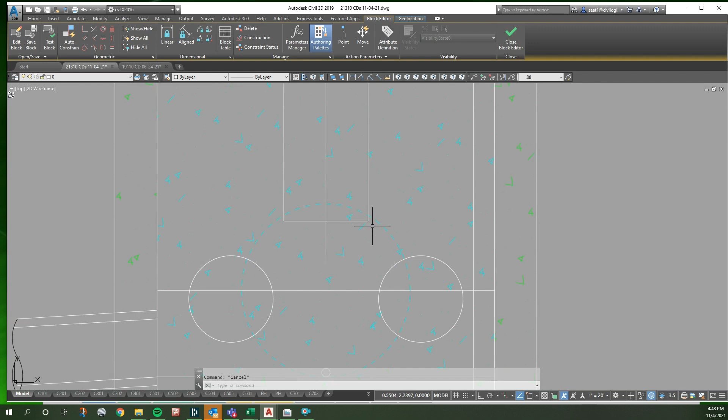All right, 12 divided by 15 is 0.8. So I'm going to take this guy and scale him from that point by 0.8, and scale this guy from the quadrant by 0.8. And I'm going to try to stretch this guy from there to there, and let's move these guys over from that quadrant to our 3-inch line, and put a 3-inch line over here, move him from there to there.

Man, we could really go down further if we wanted to. I mean, we may not even need those at all. Like, what if we just did one hole on one side and then a thing that went down? What's interesting sometimes is I've done ponds where all you have is an outflow pipe, and that's your entire control, and you basically just say you don't have any of this stuff, and that's the only thing, and you can kind of size that and get it to work. So there's a lot of different things you can do, but those types of things only work well in very low head ponds like this. If you had a 10-foot deep pond and all you had was an outflow pipe, you'd have tons of head pressure gushing it out that pipe, and that would never work.

Alright, so we kind of like this, let's save it. And do we just want to try another one? We really don't need V2 at all, but I didn't want to delete that until we had a V3 that worked.

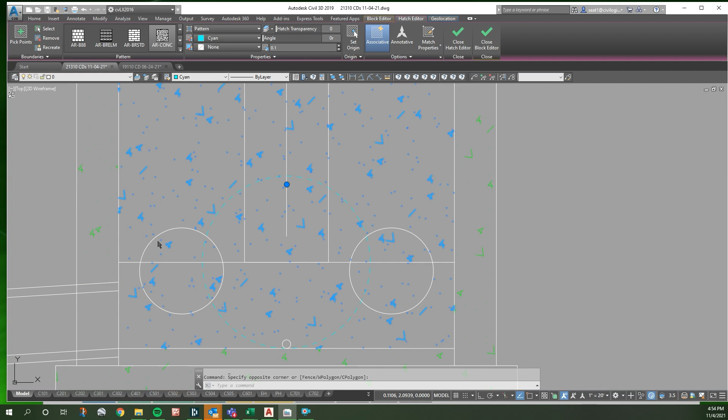So that's where I start thinking, alright, it's going to take an hour to draw up this detail. We already have it in Hydraflow. Do we just put it in there because it basically functions the same, and not have to listen to some box checker tell us we don't know what we're doing, and try to convince him we do know what we're doing when it's way above his level of comprehension? Or do we just do this and act like everything's normal? You know, it's going to be cheaper if they don't do anything.

So those are good decisions to think about. And if that's the outflow, we could really ellipse from the center, make that sucker a little wider. And let's put him coming in over here like this. So that could be our inflow. And that's our outflow. I mean, we'd still want to label them.

So which do y'all like better? The one hole or the two hole? If you're trying to save money, probably go with just the outflow, just the pipe.

Yeah. Here's another idea. What if we just get rid of the holes altogether and just do a wide hole weir here, and then we just lower this down to where they're just kind of building this little thing, a little weir. Let's try that.

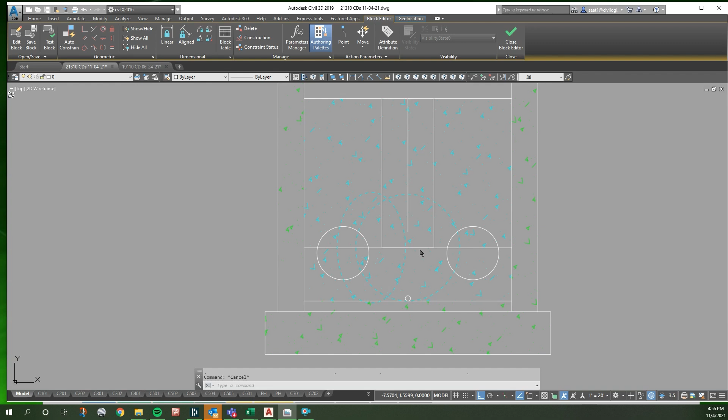And then it looks like we have something, but it still is not much. Good, good, good, good, good, good. Did I click all of them? That's pretty close. We're still at the same 35, so it kind of doesn't matter, but it's going to be more simple for them to make, and we just have that one little hole in the beginning. I like that because it looks like we're still doing something, but that's going to be pretty easy to do.

This guy is 2 feet wide, right? Did we do 2 feet wide? I catch that. And the top is 1 foot up. Oh, I need to lower this down. That's 1. Lower this down 0.6.

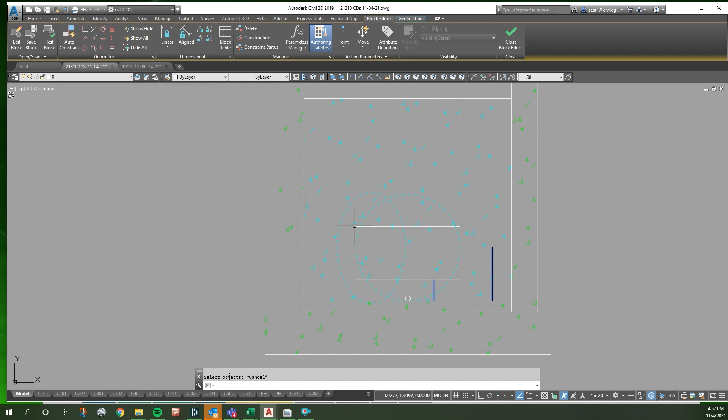Oh, no, that was supposed to be to there, wasn't it? 0.4. I guess that could go over there. So that's really all we have now. That, and then just a gap. That's going to be pretty cheap and easy to do.

Okay. We'll save V4 precipitation. You already have, you put this in, right? Right, okay. And we'll just go to reports, skip that, never prints, looking good anyways.

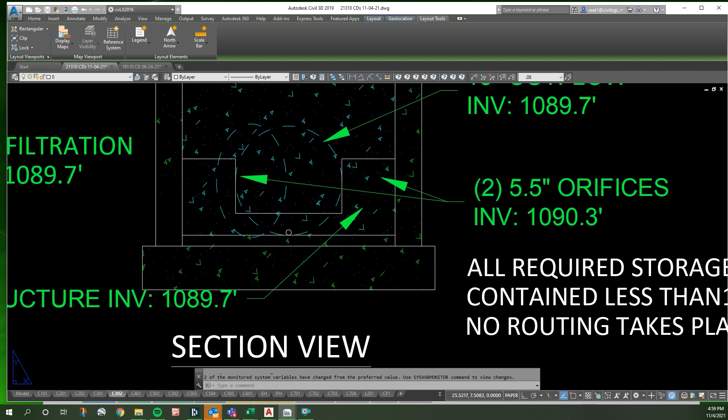Actually, I had this idea. Let's just do, can we do just the summary pages? What if we do the summary pages, rainfall report, and return period recap? Print to PDF. Two, 1, 3, 1, 0. See what that looks like. Alright, I'm gonna stop.